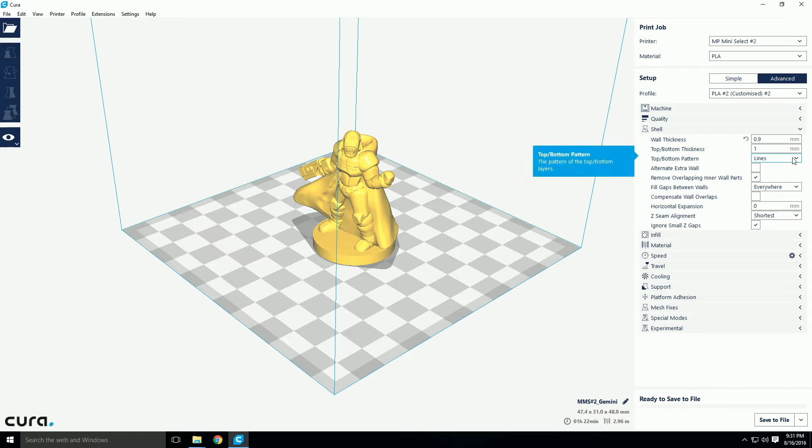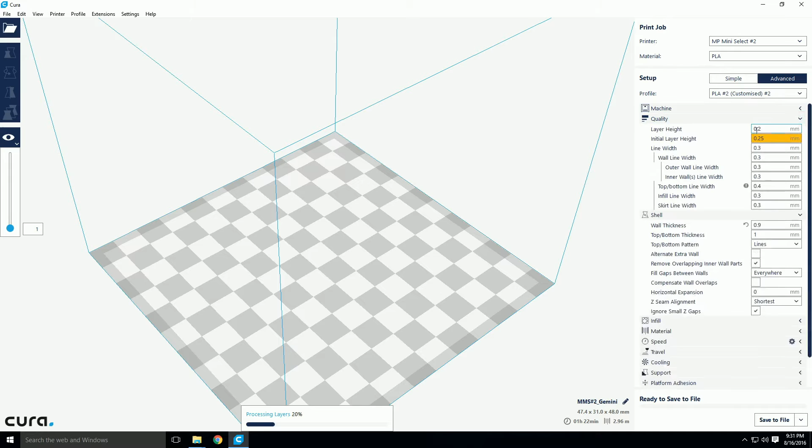Alright, let's go on to shell. So we've already talked about wall thickness. Everybody should be comfortable with that concept. We've already talked about top and bottom thickness. Top and bottom pattern. Now I'm going to go into the slice view for this part here. So we'll let Cura think about that for a minute and slice it. The top and bottom pattern is the method or the path in which it will fill in the top and bottom of your model. So I'm going to do one quick thing here just to make slicing a little bit quicker. We're going to change this to 0.3 just to speed it up a little bit. Okay, so I've swapped in just a simple test cube for this next section just to make updating faster.

This will change the way in which it fills in the area inside of your perimeters in the solid portion. So, as you might imagine, lines means this is going to go back and forth, side to side. Concentric means it'll keep going around and around until it gets to the center. And then zigzag will actually go parallel to the walls, over and then back.

These are very nitpicky settings. Most of the time, you won't notice a difference between the outcome of your print when choosing these. There are some times, for example, with concentric, with a symmetrical item, where you'd like to have that top and bottom pattern just be perfectly symmetrical with the item. You don't want lines breaking it up. That's one that I could see. Zigzag, I've literally never used. But hey, if you want to play around with it, sky's the limit.

Alternate extra wall. This is a great one for people who are working on building something that's mechanical in nature and they want to get a little more strength out of the part. And what it'll do is every other layer, it will put an extra perimeter, an extra wall layer down, and it will sandwich the infill beneath it. It'll basically sandwich that infill connecting point, and it will create a stronger print as the result of it. If you're just doing something casually, or it's a cosmetic print, it's probably not necessary. But it also doesn't really hurt, aside from the fact that it might take a little extra time to print that extra wall.

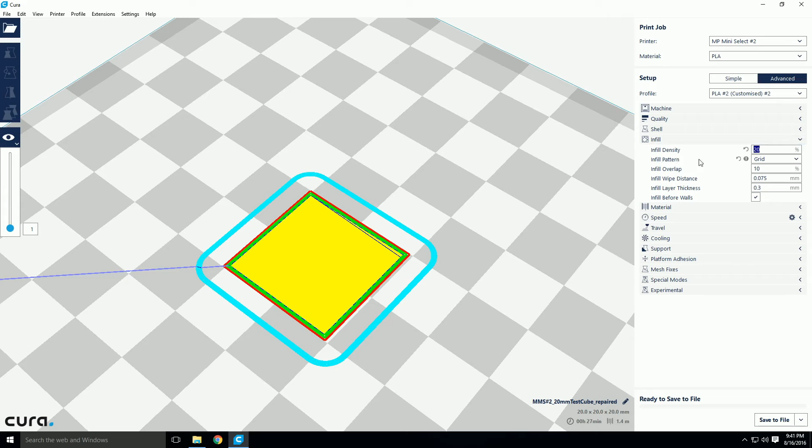All right, moving on to infill. Again, this is something we've obviously touched on the primary factors in here, which is density, which determines how much plastic goes on the inside of your model. We maybe talked briefly about pattern last time, but let's talk about it again really quickly. So there are several different options.

Concentric, as we'll see here in a second, just puts all of the infill at that percentage, concentric around the center of the model. Grid, as we just saw, is the default, and it's just a crisscrossing pattern. It is pretty easy on your printer because the printer goes all the way to the edge of the model before switching to the next line, and it doesn't put a lot of stress on the printer's motion components. And actually, by that matter, concentric can also be pretty low stress on your printer because it's just going around in circles.

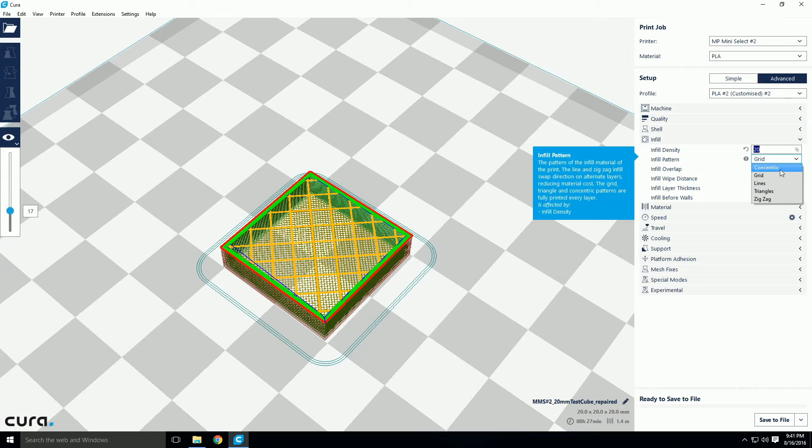Lines takes all of the infill and just puts it in one direction, typically at some orthogonal angle with respect to the rest of the model. And it is quicker than grid, but it's obviously not as strong. So if it's a mechanical model, a functional item, you probably don't want to use lines.

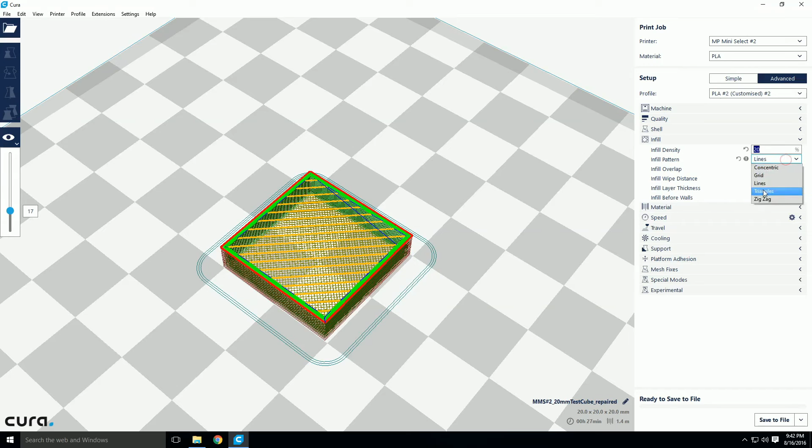And then triangles is a cross between grid and something like hexagons or octagons, which other slicers have. It is designed to be stronger, probably the strongest, but it requires a little more printer time. It also doesn't normalize the infill pattern to the part. And in fact, actually, this is true with I think all of these. The infill patterns normalize to your bed.

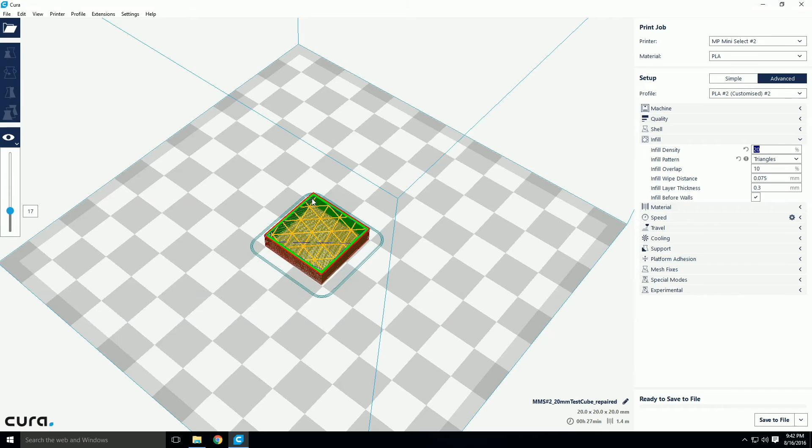So if you were to move your part around, you would actually be able to fill the model in a slightly different pattern. So because of that, you can have some non-symmetrical endpoints in your model. If you look at this one, we have a lot of triangle points ending in this corner. We have almost none ending in this corner. So in general, it will probably be stronger, but it can also look a little bit strange depending on how the pattern fills out inside of your model.

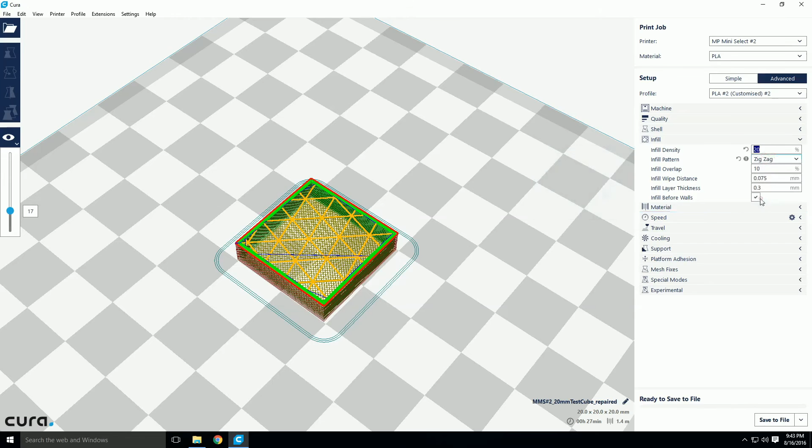And then finally, we have zigzag. Zigzag is kind of like lines, except instead of just starting and stopping at the wall, it actually connects each line from side to side. So it's sort of like one continuous thread of infill. It's a little bit stronger than lines, but still not as strong as grid or triangles.

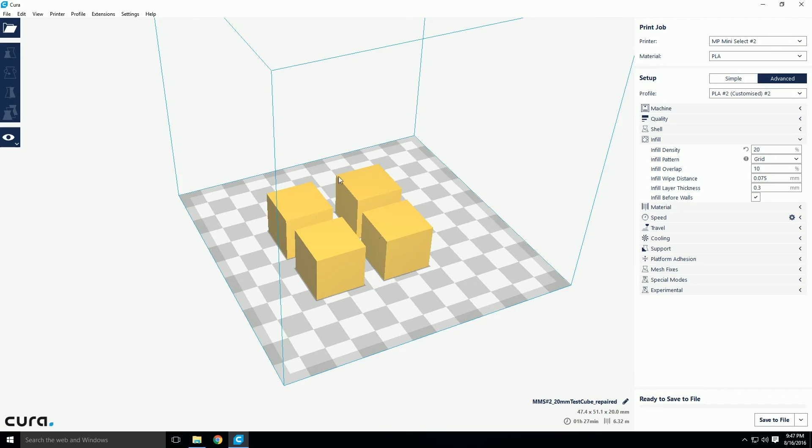Okay, while we are in the infill topic, I want to show you guys one other feature that is new in Cura 2 that I think a lot of people miss, and is actually something that is very well known for Simplify3D, and that is multiple options per item, or per single print. So for example, I have gone through and I've selected different infill patterns for each of these, and to do that you would simply select the object, click on the per object settings, and add a setting. So I've already added a separate infill pattern.

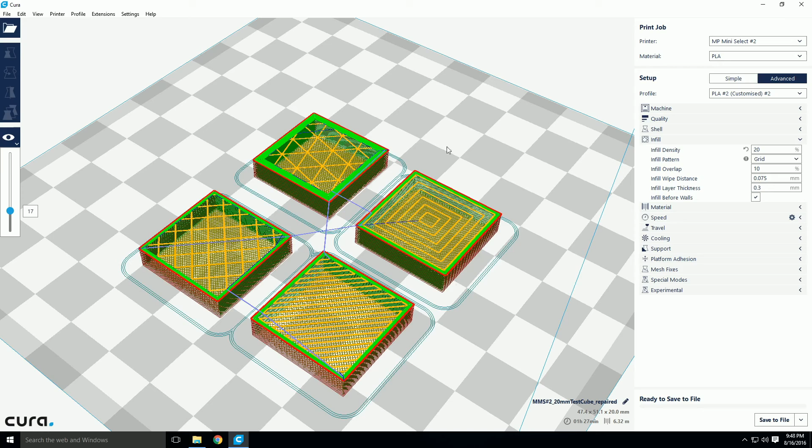So if I go to my layer views here, we can see that I've selected different infill patterns for each of these, and for this one I've selected a different wall thickness. Another thing that we could do, we could go into per object settings, we could add another setting, we could go down to material, and we could actually tell it to print at a slightly different temperature. This is very powerful if you want to test out a new material and you want to quickly check how it performs at a wide variety of temperatures.

So you could print 4 cubes, you could print them at 4 different temperatures in 5-degree increments. You could check out how the material responds to different flow rates. So you could start at 95%, 100%, 105%, 110%. See how that impacts it. You could test all your retraction settings on a single print by changing the retraction speed or the retraction distance.

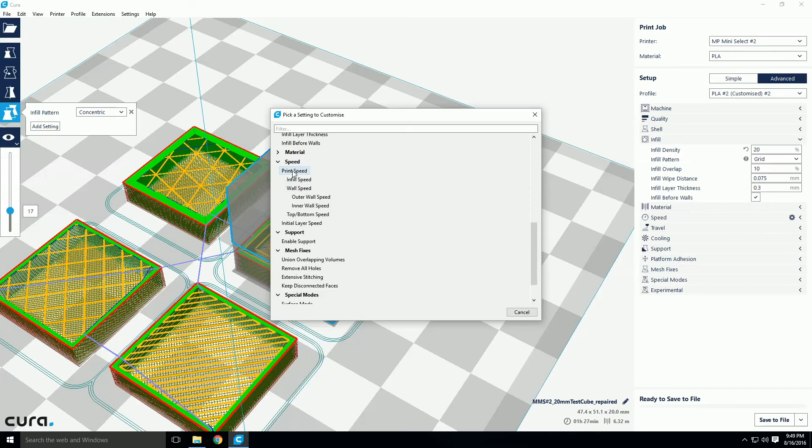So this is a very powerful tool, both for troubleshooting and optimizing, but also just for practical things, like if you want to print 4 different items all at once, and you've got some large, low detail items you want to print relatively fast with a low percent infill, and then you've got some high detail objects you want it to print slower. So we could go down to print speed, and we could change our print speed for every item. So we could have a high detailed object that it slows way down to when it gets to, and then a coarse object that it speeds way up to when it gets to. This is incredibly powerful.

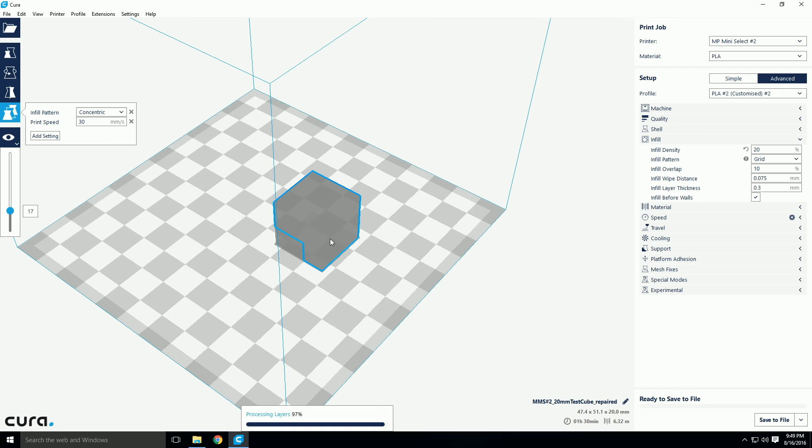Now, if you're using a Monoprice Select Mini, like I'm using for this example, you probably aren't going to load your print bed up with more than a few things, because there just isn't room for it. But for anybody watching who's got a larger, maybe Prusa i3 design, or something with an 8x8 or an 8x10 bed, and you can put a lot of items on there, being able to customize every single item in there to maximize its print quality and minimize the print time is incredible.

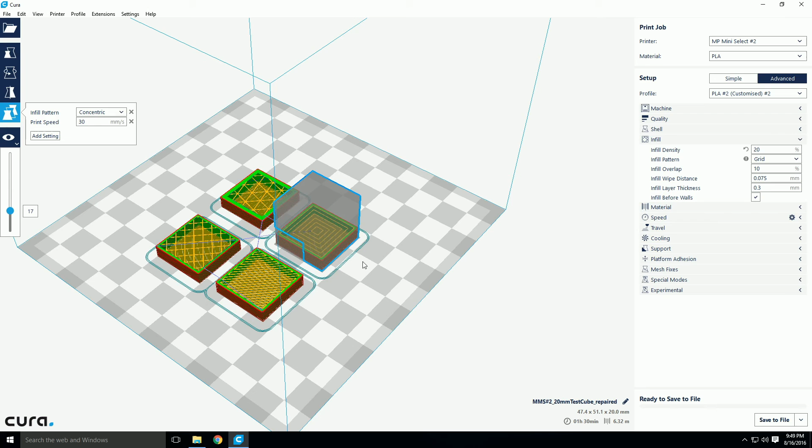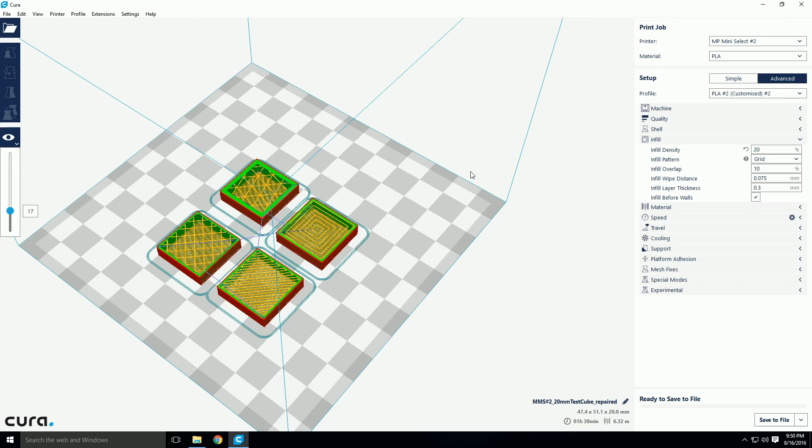Now, the one limitation is that it still forces you to have the same layer height for each object on the plate. So you can't print one at 100 microns and another one at 300 microns. And while it's technically possible, in fact, I believe Simplify3D's version of this feature allows you to do that, it does introduce some complications in that you can have parts printing at different rates, and you'll have one object that's some multiple of microns higher than another item. There are some ways to solve that problem, but I think they decided to just limit the layer height to a single option for now, and we'll see in future releases of this multiple objects, multiple settings feature if they begin to allow you to differentiate layer qualities between items.

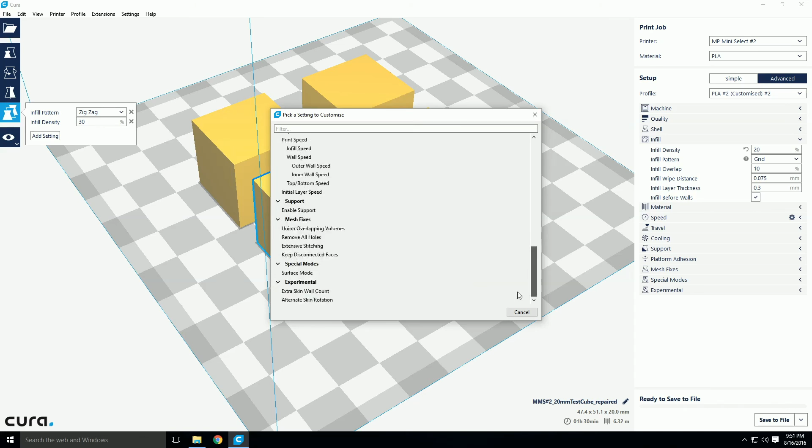But even without being able to do that, there's a million things you can do that are incredibly useful with this feature, and I've heard almost no one talking about it, which is surprising due to how powerful it is and how much value you can get out of it. So that was a big one that I wanted to touch on, and while we were talking about infill, it was kind of a natural segue.

A couple other things down here under infill that we didn't talk about in the basic settings video. Infill overlap basically determines how much the infill will overlap into your printed wall, your printed perimeter. And this basically determines how strong the infill bonds with those walls that you have printed. 10% is a good number. If you feel like your infill is breaking free from your walls, you could bump that up a little bit.

If you are making a very cosmetic print with thin walls and you didn't like seeing that infill running into your inner wall layer, maybe if it's transparent material, turning the infill overlap down or even off is certainly an option. Although in those cases, I typically recommend that people actually set their infill density to nothing at all, 0%. And as long as it's not a large flat-topped item that would have to bridge the entire top, you can actually print figurines and other models very cleanly, completely hollow, just with the perimeter walls.

Infill wipe distance. This is very similar to overlap, except instead of driving the extruder while it's going into the wall, it actually stops the extruder and allows the pressure that has built up in the nozzle from printing to extrude a little bit of material as the nozzle passes into the wall. I think it's a good option because it helps create cleaner retractions. Because when you go to do the retraction after having done infill wipe, you have less pressure in your nozzle already, and you'll have less likelihood of oozing whenever you are passing from one part to the next, or one feature of the part to the other feature of the part.